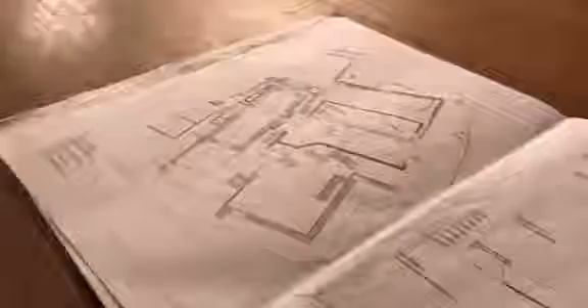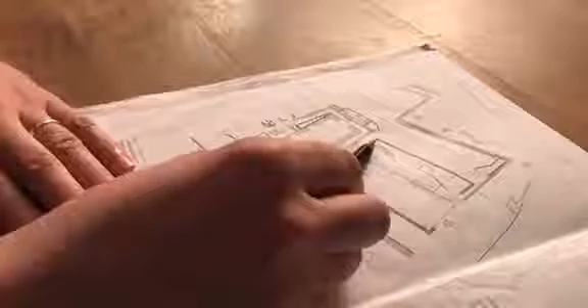A couple of key things to look at: first, car parking. We've looked closely at putting some car spaces in, coming up with a plan within the bank, just to the north of the access road. Old School Hill runs north to south, and where people used to park on this area, we're going to cut into the bank and put in a retaining wall.

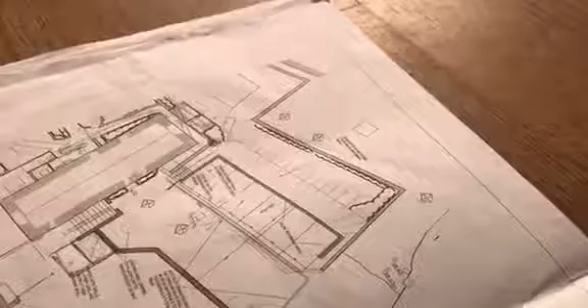That'll give us 6 car spaces immediately adjacent to the building. Around Southstoke the ground conditions are difficult, so we've had to do geotechnical surveys of the area between the Priory wall and our new car spaces, and we've come up with a strategy which is safe and will give us some immediate parking in the curtilage of the building.

Moving on to the building itself. Because a commercial kitchen can be pretty destructive to an old building like the Packhorse, we've worked with BANES planners on producing a kitchen extension. This is on the lower terrace for those who know the building well. There's a lower garden here, and that's where we'll be putting a timber framed kitchen, which will have its extract going up through a chimney at the south end.

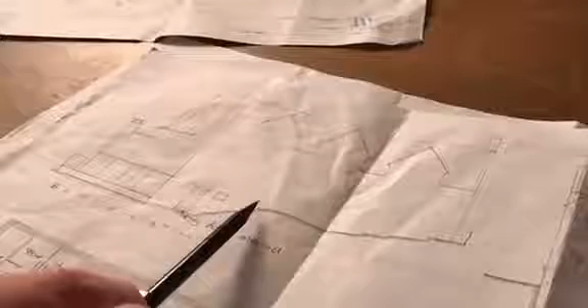The kitchen itself will actually extend into the lower ground of the Packhorse. I don't know if any of you have been down there, but it was once used as the kitchen. There'll be a dumbwaiter at the north end, which will take food up onto the ground floor and then onto the first floor, which we're bringing into active use for the pub.

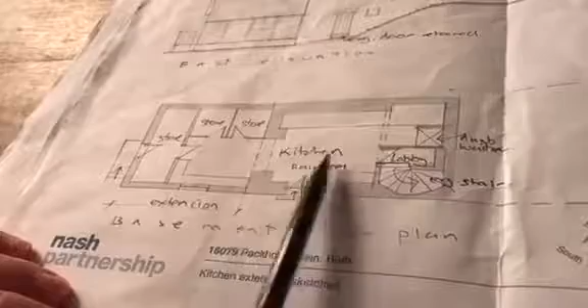In terms of the layout downstairs, we'll have a beer store, a couple of food stores, a food prep area, and a cooking range. There'll be an island as well, and then there's the dumbwaiter situated at the north end - that's a critical part of the design of this building.

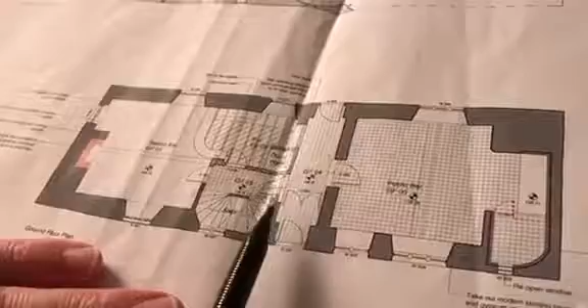Moving upstairs, the dumbwaiter will come up on the right hand side of the bar. For those who remember, the Packhorse bar sat just to the left of the cross passage - this is the front door to the pub. You come in, and there used to be a glass window here with lots of drinking going on around here. The dumbwaiter will come up in part of that area, and the bar will be extended slightly.

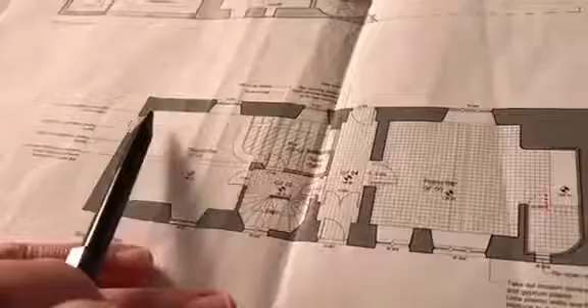Into what's known as the Saloon bar to the left, which was the room with panelling and the gas fire, if you remember. That room will remain substantially intact, although we hope to work with the council to make the most of the 400-year-old fireplace we've just found behind plaster in the saloon bar.

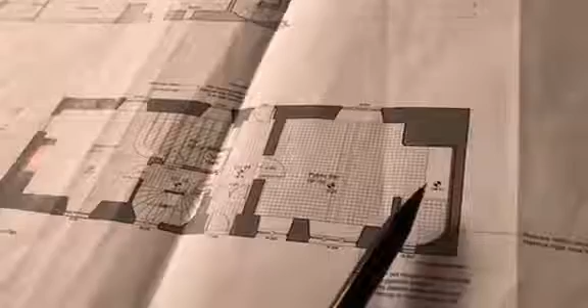On the right hand side is the public bar, which has the Inglenook fireplace. That bar will stay substantially the same, although like the whole building it'll need rewiring and replumbing, but we'll be looking to retain as much of the character of that room as we possibly can.

Moving upstairs to the first floor - in some ways this is the most exciting part of the project, because this floor was never used as a public space before. We've got 2 great rooms up here. On the left hand side, the south end, you come up the spiral stair onto a landing as was before, and the kitchen used to be in the core in the centre of the building.

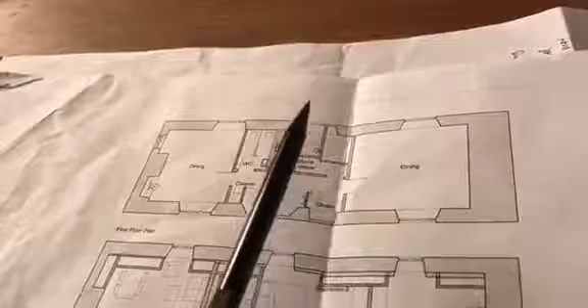That will now see the dumbwaiter coming up again, so it's the 3rd floor it will have been on. There are also some WCs, which everyone will be glad to know you'll be able to use inside the building this time, and not outside.

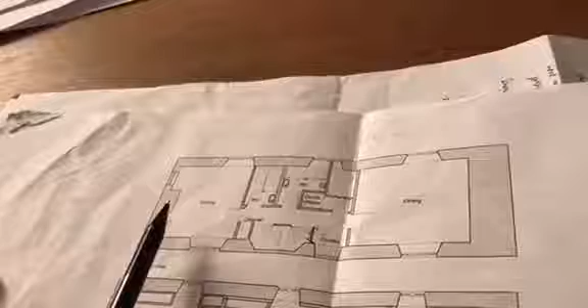To the left is a small room, which is a dining room, but it's possibly one of the most characterful rooms in the pub. There's a wonderful original fireplace on the left here, and we see this as a room where you'll be able to come and sit and work in the day, or have a drink before supper at night. It's a bit away from the main bars downstairs, and hopefully a bit quieter for those who want that sort of setting for the evening.

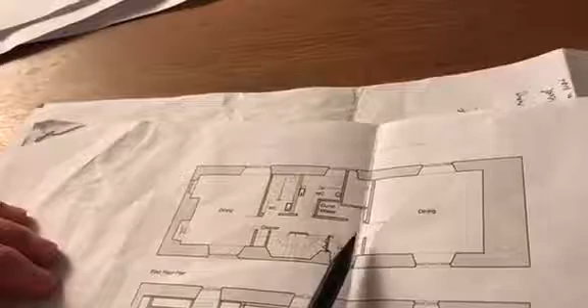To the right as you come up the stairs will be the main dining room, and at the moment this is two rooms. There's a partition straight down the middle running north to south, which is a breeze block partition and can be removed. We'll then have covers for circa 18 people up there, and it'll be a good facility for people to be able to hire out if they want functions in the day or evenings. Okay, and finally in the building, we're up at the top floor now.

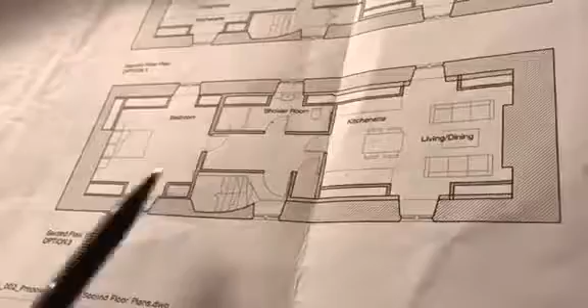This is the stair that runs all the way up the building, and this is where the manager's flat or the chef's flat accommodation will be. It's quite simple. There's a one-bedroom on the south end, a shower facility in the middle, and a kitchen dining space at the end. It's actually a very nice flat. It's got six windows. This one at the moment is blocked, and we'll be looking probably to unblock that one.

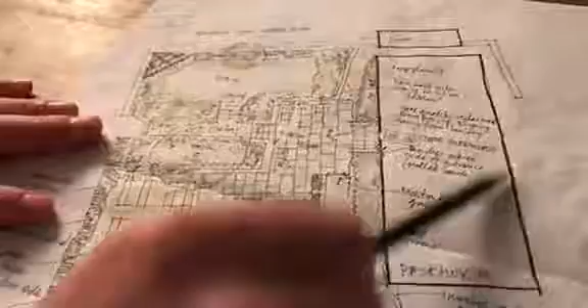Okay, just moving on now to the external spaces, and particularly the pub garden. Here's the pub, here's the Packhorse. Front door off the main road is to the right here. We're really grateful for all the work that Tom Chapman and Alex Keane have done in really trying to work out what is the right solution for a historic building, but also the needs of a modern pub. We're really delighted with the plans they've come up with.

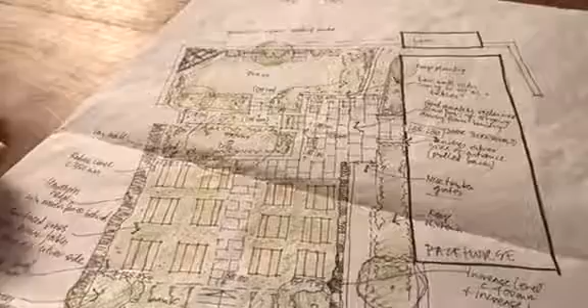Essentially, it retains the topmost terrace, which is grass and planted around as it is now, but that is supplemented with some trees and benches. We're also working hard to try and use the tradition of people sitting outside the back door of the pub, which used to happen a lot.

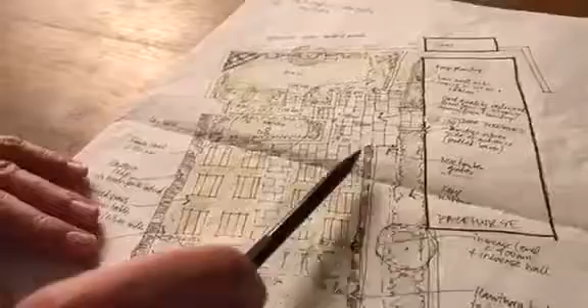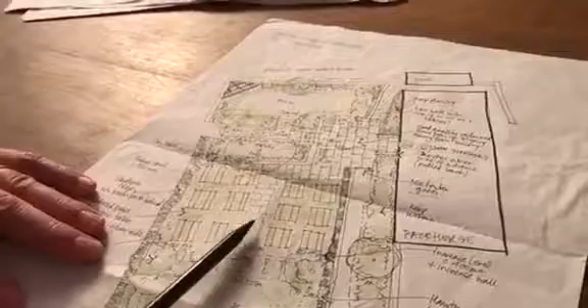So we're showing some paving there going up onto the existing path, which goes up and out towards the South Stoke Plateau. Just below that, we've got a much bigger flat area, because as you may remember, this area was broken up into a number of terraces. So now we have a large dining area. I think it's worth saying we're showing probably too much density here, too many tables, but essentially there'll be a paved dining area - and although this shows grass, it'll probably be paved - and then maybe a smaller grass dining area to the left.

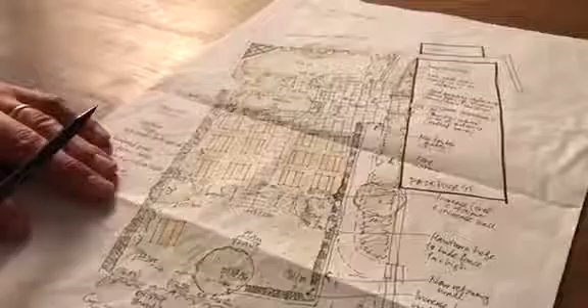We're also trying to bring into play the bottom of the garden, which was probably too steep and uneven to be used, and we're looking to terrace that out a bit more by removing the breeze blocks and creating a nice hill here for people to sit on, whilst there's also a play area for children just below.

I hope you found that not only useful but exciting. We're certainly very excited about seeing life come back into the Packhorse, and we feel like we're getting close to touching distance. There's obviously a fair way to go with fundraising, so encouragement for everyone to push on that note.

But we'd also like to take this moment to thank all the consultants who've often given their time for free to help the project along. Bruce Clark from Nash Partnership Architects in Sydney Buildings. We've got Jeff Stott from Mann Williams. We've got Simon Cale and Kerry Griffiths from Nicholas Pearson Associates, who've helped us with ecology, because we do have a resident lesser horseshoe bat up in the top floor which needs accommodating. I've mentioned Alex Keane and Tom Chapman as well, so many thanks to all of those people.

And Nick, I think I should say on behalf of all the shareholders and friends of the project as well, a huge thanks to you, mate. I think what you've pulled together in the last few months has been a tremendous amount of work. I've seen that, and it's a real big debt of thanks to you. Thanks, Tom.